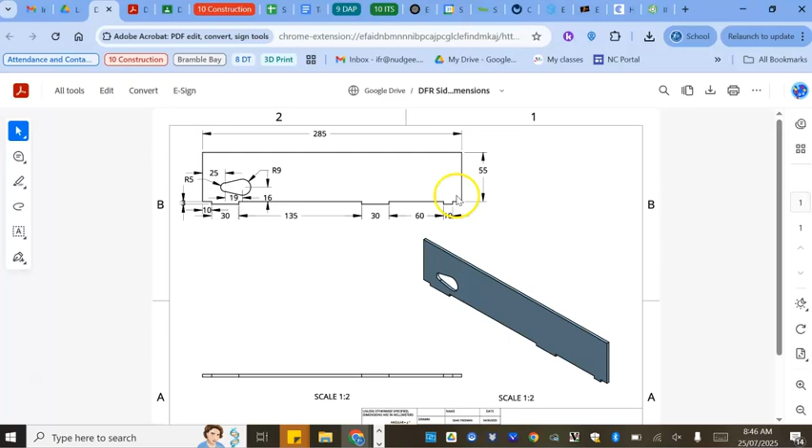So I'm just going to go create, and that will load up. As that's loading up, a couple of dimensions we need to be familiar with. Firstly, we know that the tab we're going to make is 10, the material we have is 3, so remember that the rectangles will be 10 by 3 later on, but also that the gap between those tabs has to be 43, so that's something we've got to remember and come back to later on.

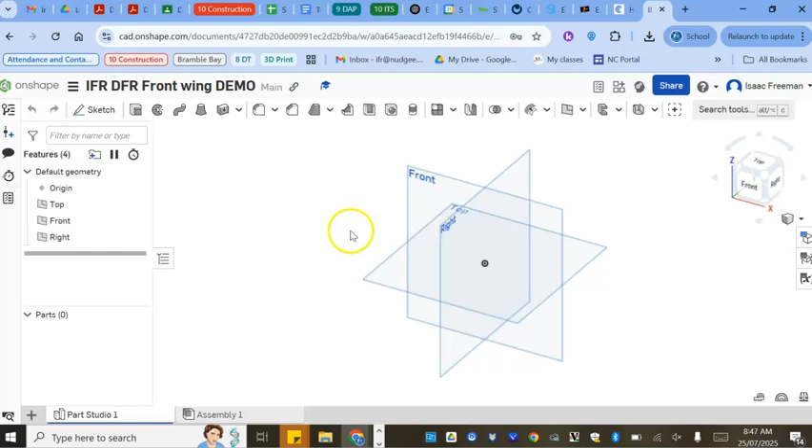And there's a couple of different ways of making this. Your teacher may have shown you a different way, and that's completely okay. So in here, again, sketch plane is important, so I'm going to go sketch, click on top view because I'm going to look at most likely it's going to be a flat edge, and then there's some curves on the side. So I'm going to go top view, going to the view cube here and rotate it to our edge there.

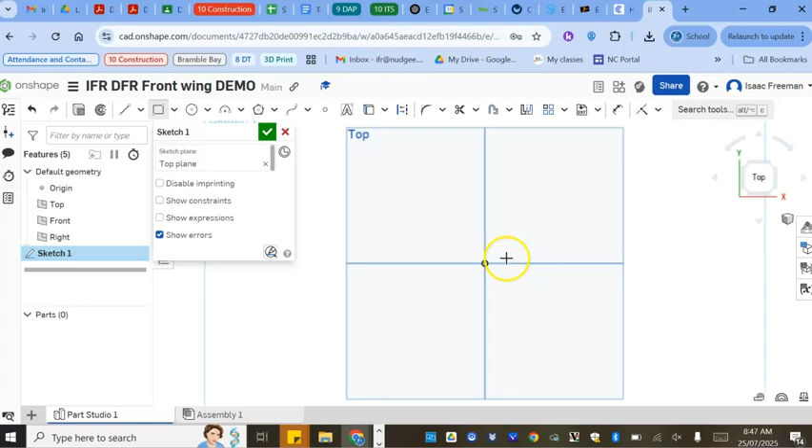From here, a couple of options. You go center point, like we did in class, or corner rectangle. So if I go a corner rectangle here, I'm simply going to take it from the center line to the right hand side. And I know that my axle for my car, and I want my front wing to be the same width as the outside of my wheels, so the outside of my wings, outside of my wheels, is lined up.

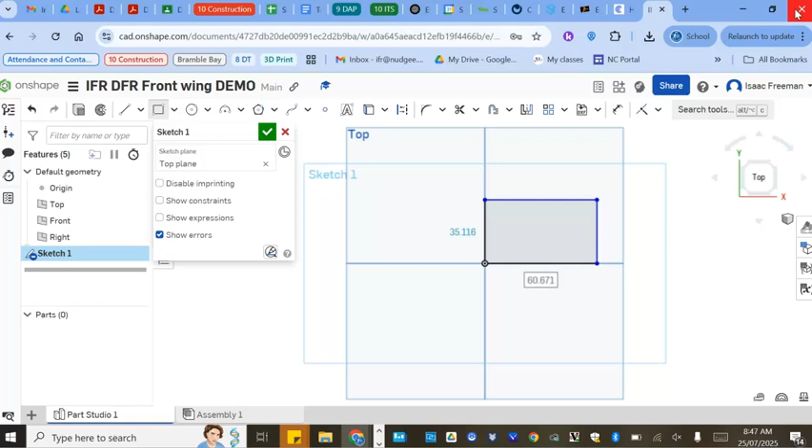So what I need to do is work out how wide my axle was and how wide each wheel is. I know that my axle was cut at 100 mil and that each wheel is 20, so I know the overall length is going to be 140, but I'm going to make it in a half shape and then simply flip and mirror it for the other side, saving doing the flares and the guard parts twice. So I'm going to know that half of 140 is 70.

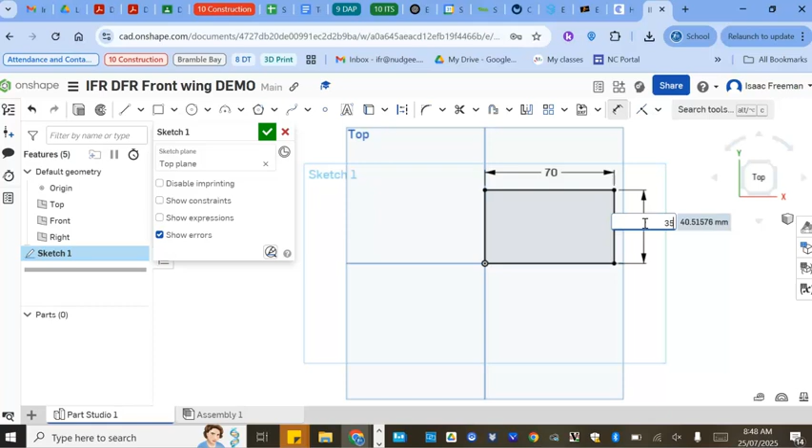So I'll type in 70. And then I'm going to go from there down. I know it has to be at least 10, so I'm going to make this 35. Actually, I'll go 30 for this one, so I'm going to make the side 30.

So from here, I already know that this is going to be the half size of what I need. I'm going to then mirror it to the other side once I've completed on this edge. So with regards to that, I know from the center line, between the two, I need to have a 43 gap, so I know that 43, I need a half of 43 for when I draw this.

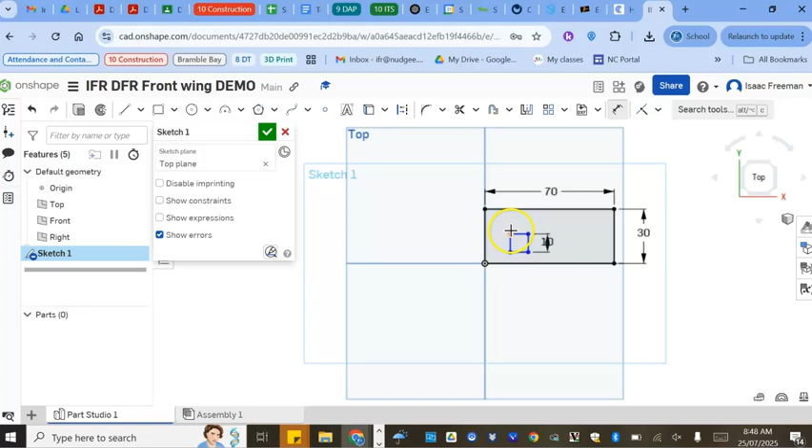So I go corner rectangle, and I know that the size has to be 10 high, and it needs to be 3 wide, because that's the size of the tab on our side part they're going to clip onto it.

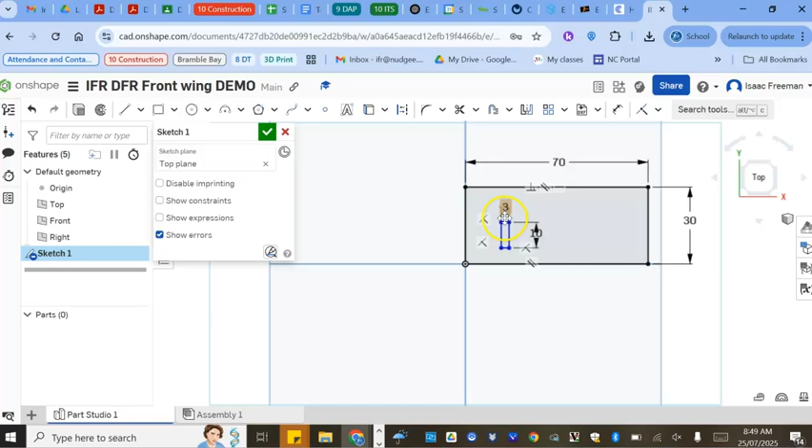Alright, so that's there. I now need to position where I want it, so if I have it further back or further forward, depending on how much wing you want over the front. So I'm just going to go here, and this is completely up to you guys, based on what you've researched and understood. So I'm just going to make this 10. Alright, so it's not going to be exactly in the middle, but it's going to be pretty close to the middle because I'm just happy with that 10 mil from there.

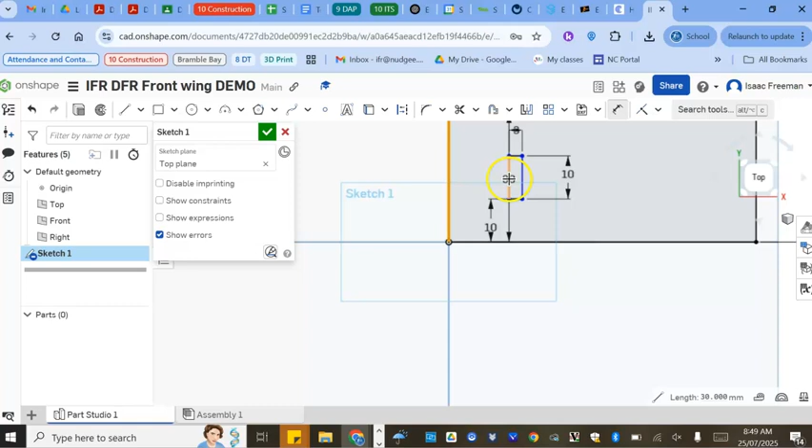Then from this line to this line, I know that it needs to be 43 total, so I need to work out half of 43, which is 21.5.

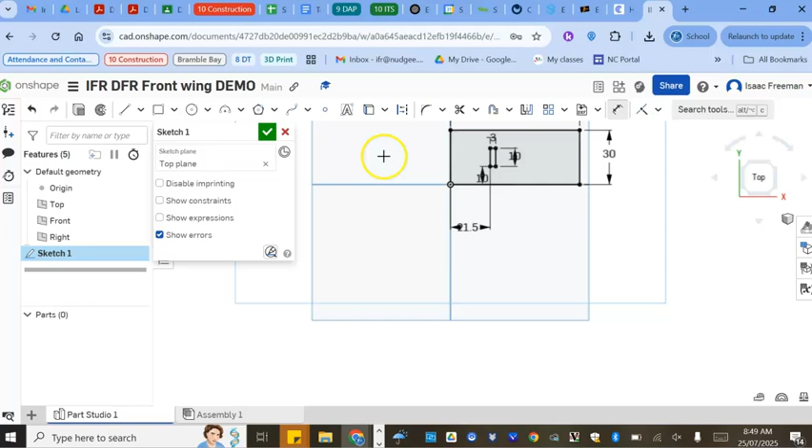Okay, now that should be spaced 21.5 in the middle. So when I mirror it, it should be 21.5 and 21.5, which is 43. So I'm going to go green tick here.

I'm now going to go to the extrude function. I'm going to click on this. I want to extrude this, keep that tab empty. I only want to extrude 3 mil because that is the thickness of the material.

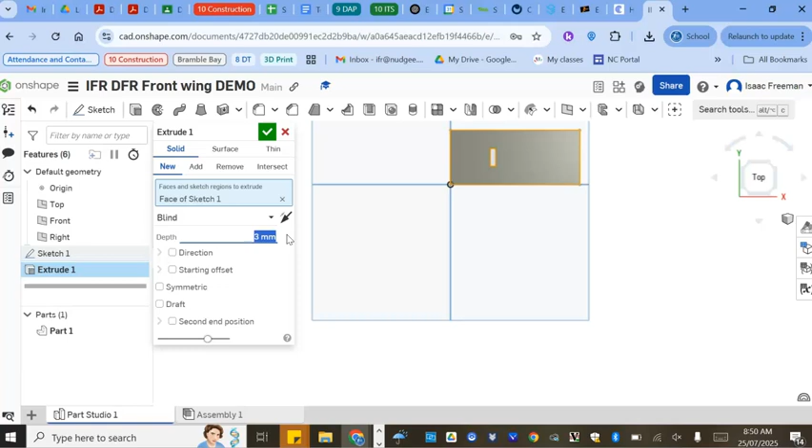Oops, so let's fix that up. Alright, go to isometric view. Alright, and that is all good there.

So now what I want to do is I want to add a side part to it. I want to add a little bit of a flare at the side to sort of shape that wing.

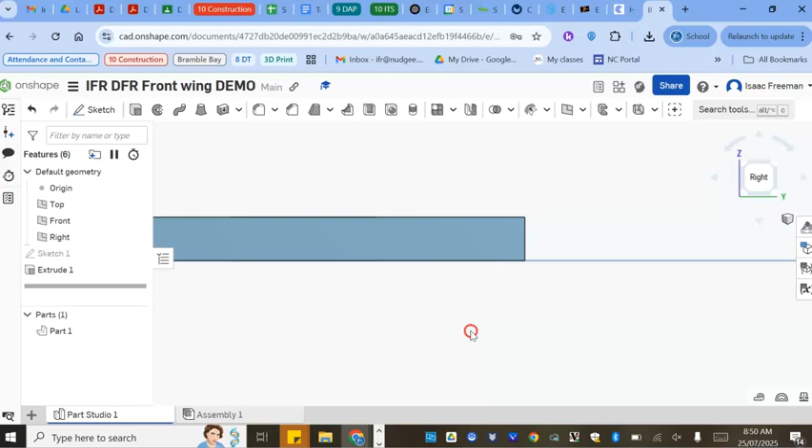Alright, so what I'm going to do now is I'm going to rotate my view to the right view, and I'm going to draw on here. So I'm going to go sketch, and I want to sketch on this plane, so the end part there, which you can see is now highlighted. So I'm going to sketch on that.

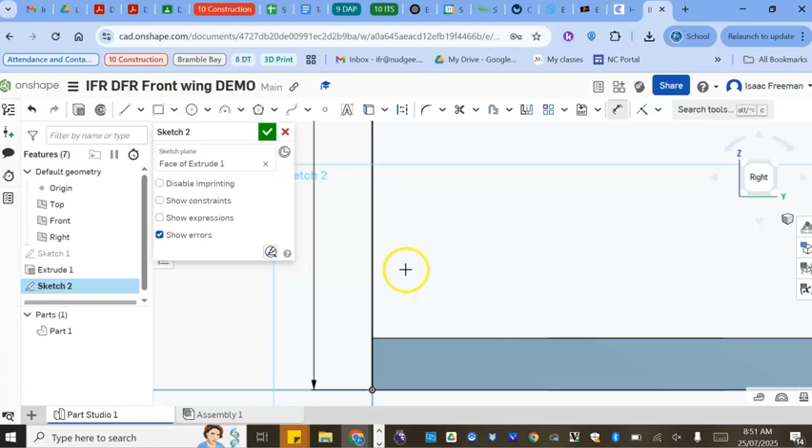I'm then going to start off by doing a line. So you want to make this a complete shape. So I want to make it go up 25. So that's going to be 25 mil up. So that might be a little bit higher.

So this is where we've sort of brainstormed and come up with our idea. So I'm going to go 15. All right, so maybe a smaller one here.

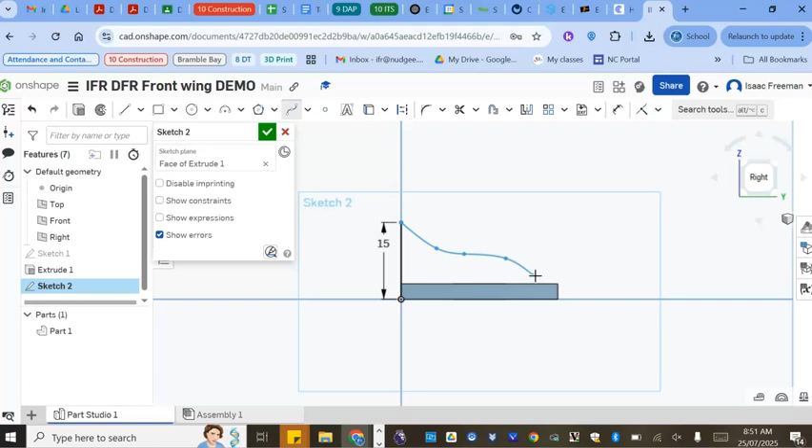From here, what I'm going to do is go to our spline tool. And this is where you can look at the curvature of your shape there.

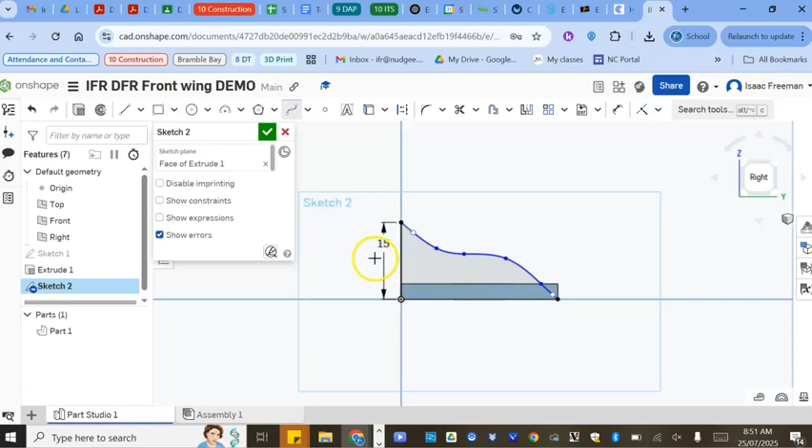So you can see now it's shaded in. I'm going to go escape, so go back to my view, check my isometric view so I can check how it's positioned here and see how it's got a little bit of an extra part in there. So I can go back and trim that later. I can leave that. It's completely up to you what we do here.

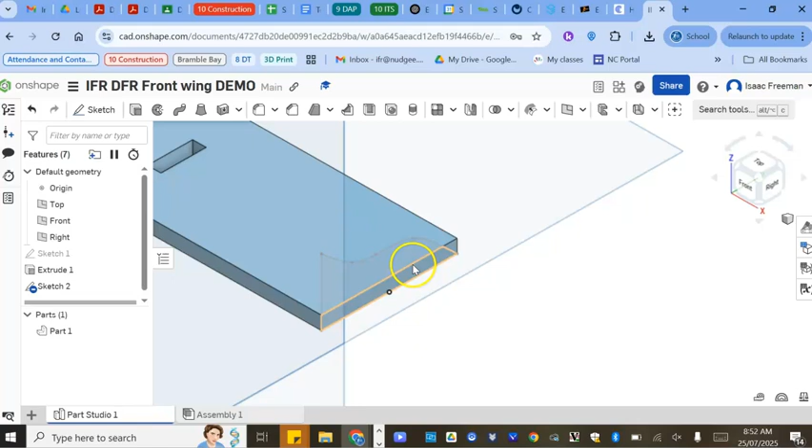I'm going to go green tick. I'm now going to select, extrude this part and this part. So it's two parts, and I don't want to go 25 mil.

I simply want that extrusion to be maybe 2 mil. I'm going to go green tick. Oh.

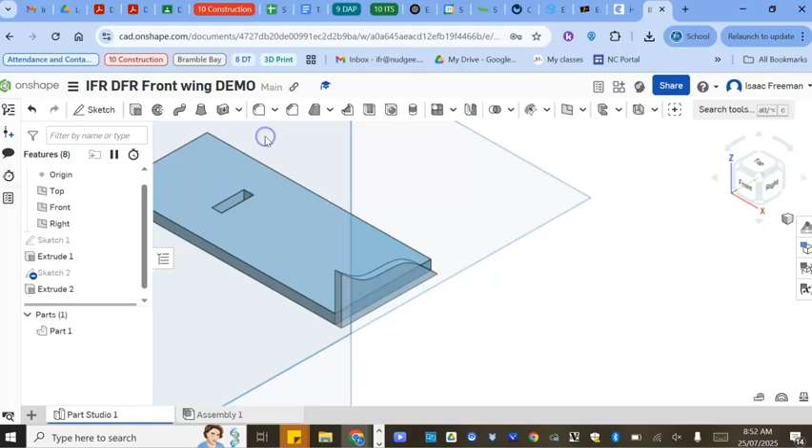And you can see now that we've got this little bit sticking out the top. So we can go back and edit to change it.

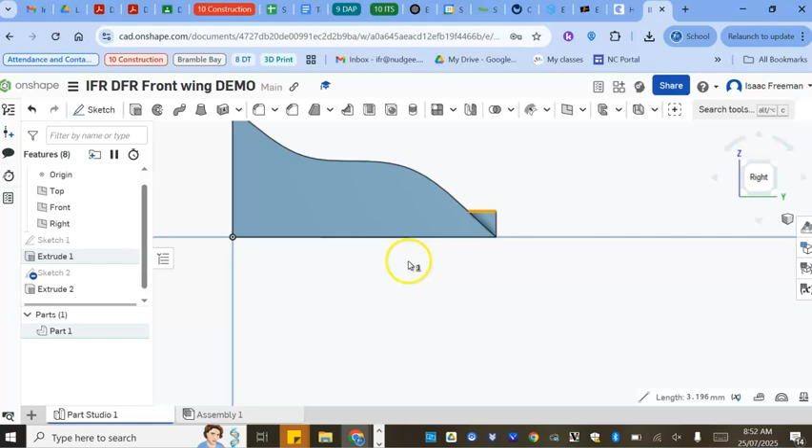Again, this is up to you what your design is. So what I'm going to do actually here is just to make this a little bit smoother and look a little bit nicer in a quick and easy way.

I'm going to go back to my second sketch. I'm going to right click and go edit. And this line here, I'm just going to go Control Z. I'm just going to make it...

Alright, I'm going to go draw my line across the bottom here. That's going to extend past the point of our flat tab. I'm going to make that a set distance of 34.

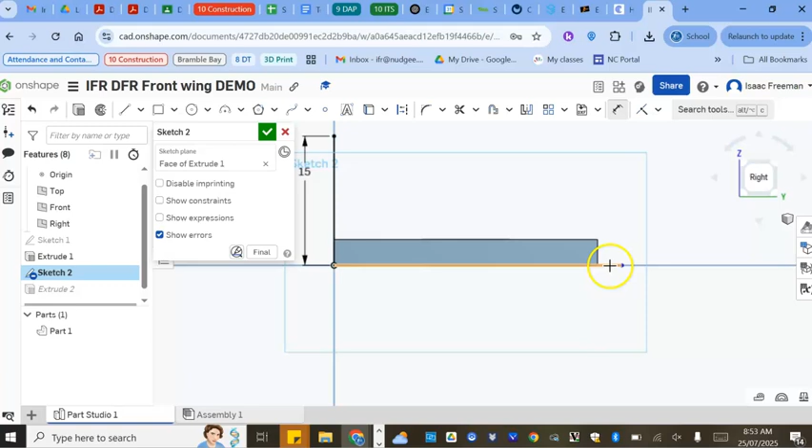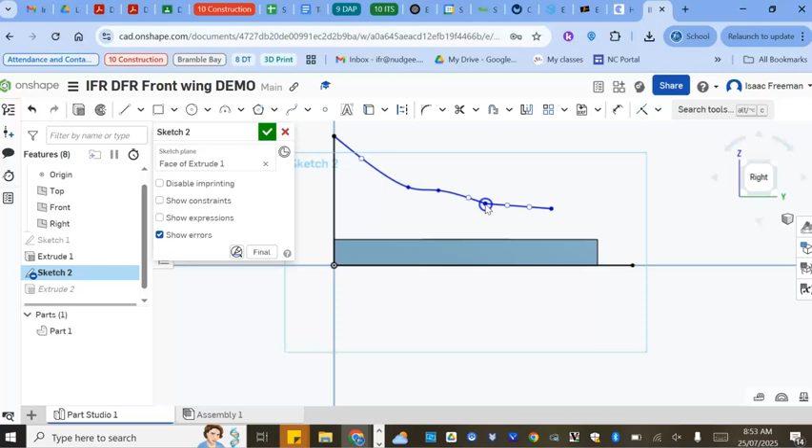Now I'm going to put my spline. So I'm just clicking and trying to move to get the desired angle that I'd like.

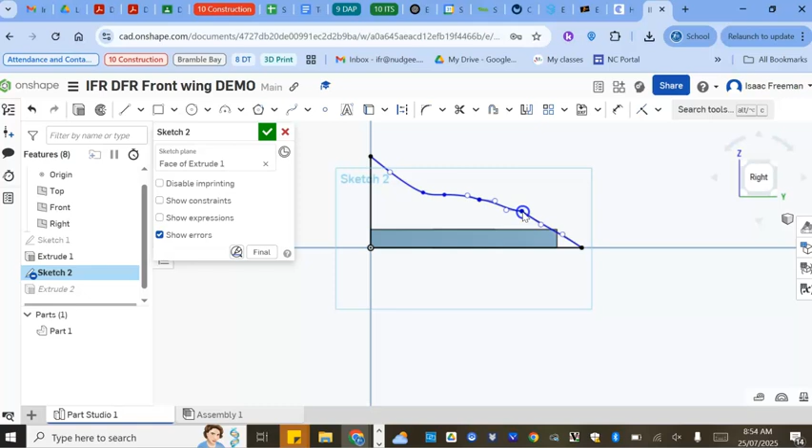Alright, so if that's going to be my shape, I can then come back and click on certain parts here and change that. So I'm just going to go like that. Again, completely up to you what your side of your shape is.

You can make this come down as well. Again, that's up to you. And now you can say this is going to be my side. So that's my side profile.

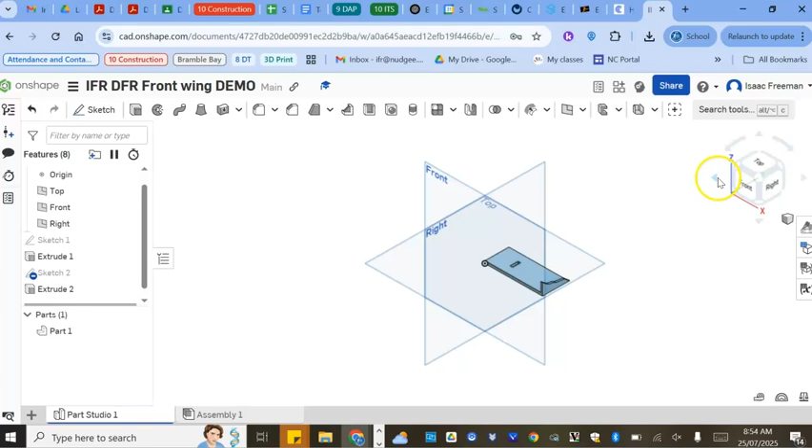Now all I need to simply do to complete my front wing, alright, is I'm going to rotate the cube to the side here. I'm going to zoom in.

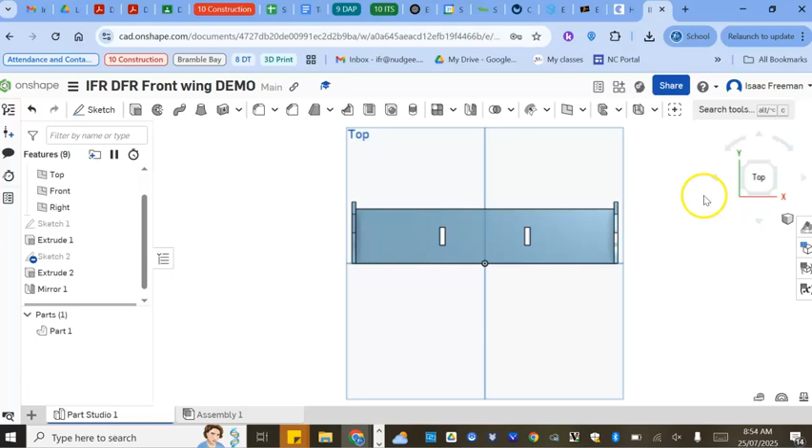I'm now going to go to our mirror function. I want to mirror this part on this plane. And now I have my spoiler, sorry, my front wing.

I'm simply going to then click here with using the rule tool, and now it says it's 43 between, which means it's going to fit. Double check that it looks like it is what you wanted in your head. That is a simple front wing.

This steps and processes I did for the front wing is essentially the exact same as what you wanted to do for your rear wing. This is a very basic, simple process. It's a simple design, but this is a really good starting point for you guys, and then from here you can build upon different ideas that you had.

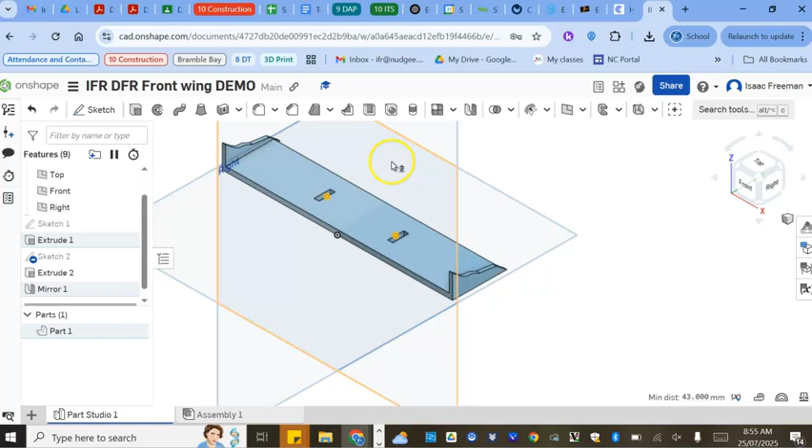So again, a couple of simple steps. Build half, so half the length that you want. Make sure this is 10 by 3. You put an end plate on it, and then you simply go to the mirror function. Okay, so that's 4 key steps we need in building our front wing.